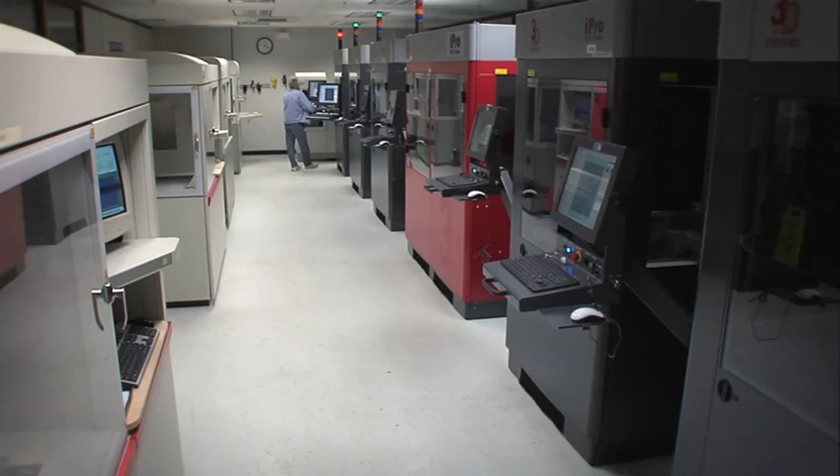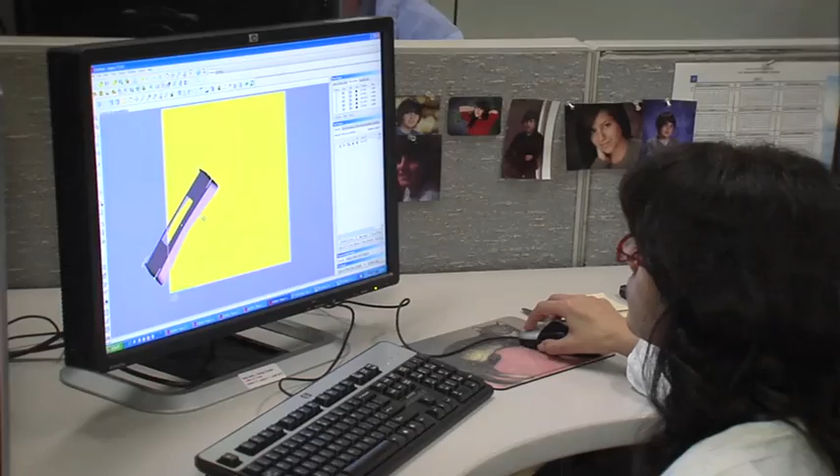This facility is operated by UAW 160 employees with some of the most competitive work rules in the corporation. These are very talented men and women, wood model makers, metal model makers, who basically operate these machines 24 hours a day, 7 days a week, 365 days a year.

These employees, these model makers, have taken their classic training and applied it to this new technology and come up with several innovations. In fact, some of the innovations that these men and women have created have become industry standards.

Our technicians work so closely with 3D manufacturing people that it has helped them to modify their equipment or actually bring enhancements into the trades and in the industry.

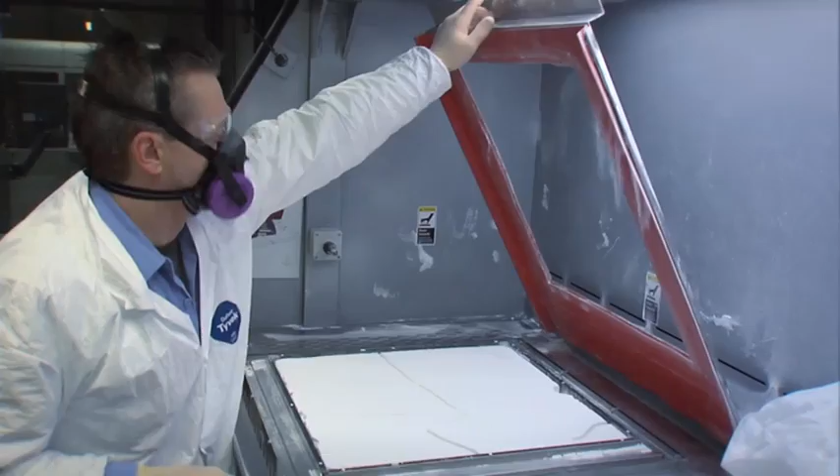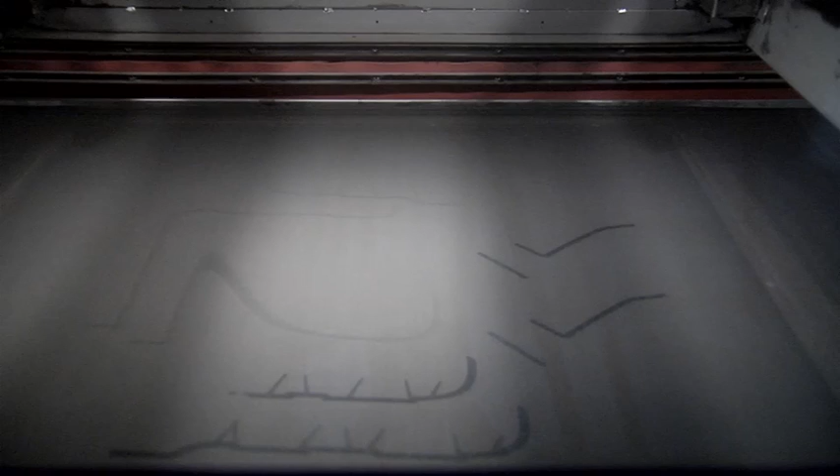Years ago, you would actually have to manually load those machines with this powder and mix those powders manually and then insert them. So they worked in conjunction with our folks to find automating ways of loading those machines. And through those ways of looking to automate them, we also found out, well, what about recycling some of this older material? Instead of just using virgin material, let's go ahead and mix a blend of reused material with new material. And they've actually developed a machine station that combines those in one.

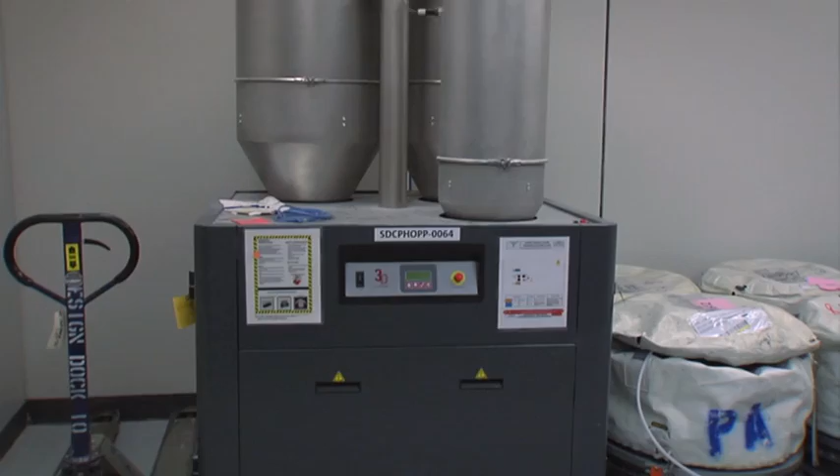To date, we calculate somewhere around 30% recycling benefit for us. And that again was with the collaboration of the Local 160 skilled trades folks down here in this very lab. They never stop amazing me on how they come up with better ways to do it.

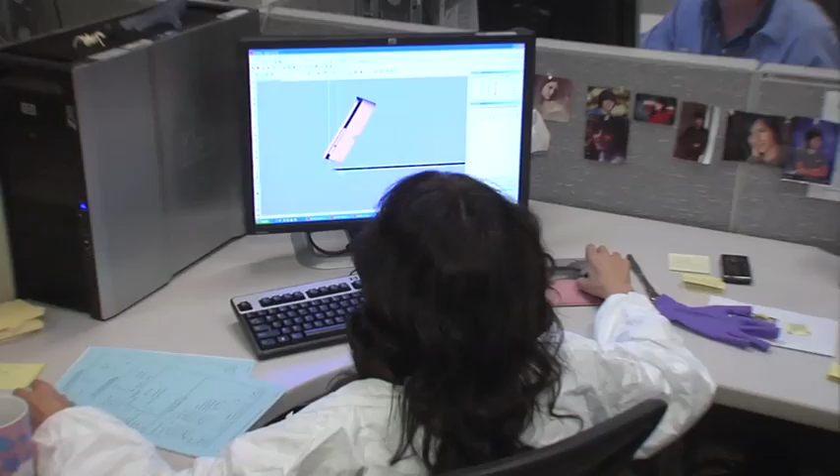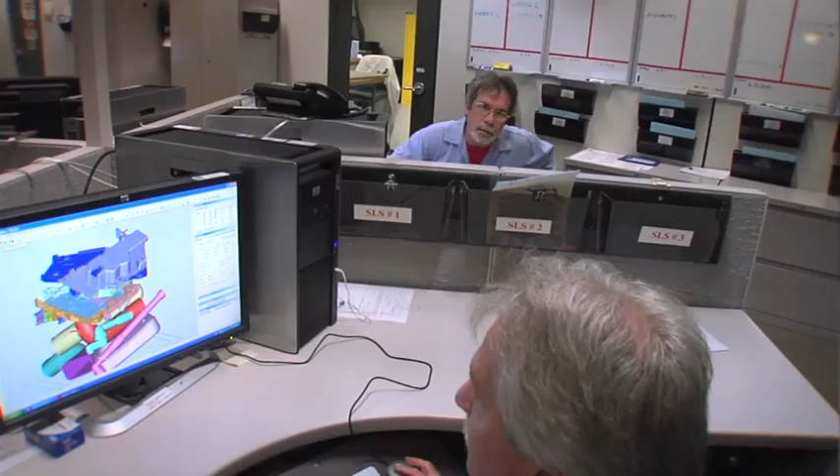I'm a wood model maker by trade. I've been in the RP lab for 15 years. The more I saw of it, I worked with it, and then I got into the department, and it just grew from there. It's unbelievable. And just seeing it advance, it's just great. I mean, things that we do now within a day or 2 days would take months to build by hand.

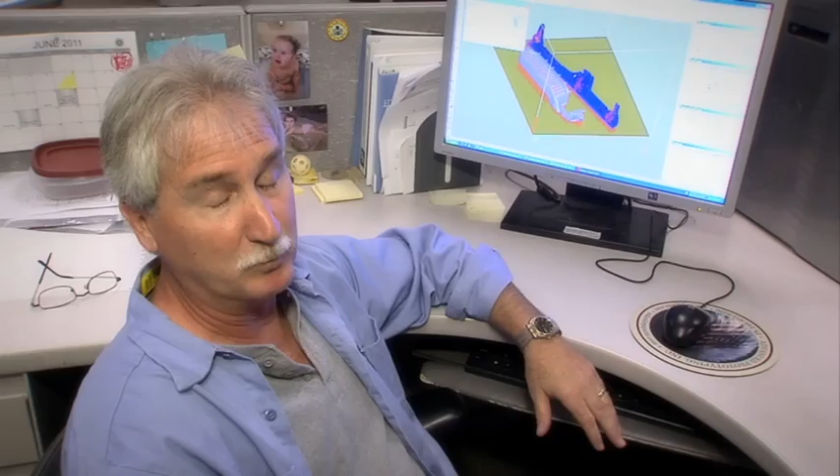We are really dedicated to what we're doing. That's the main thing. We all enjoy the work, and we want to see a good product come out, and that's our main goal. It's come a long ways from when we started.

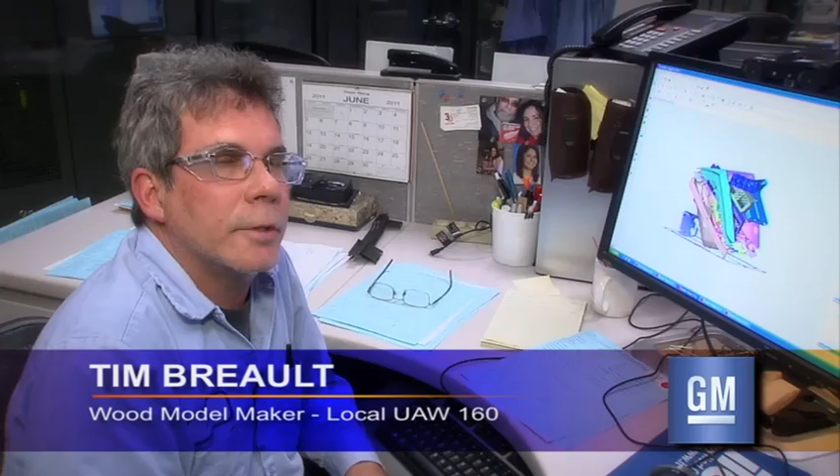I've worked for GM for 27 years. I'm a wood model maker by trade. And I've worked on the CNC machines prior to that, but it's just cutting up parts and manipulating parts, understanding how they work and function and whatnot.

As the hot jobs come down, like this one here, I was able to quick cut it. I was able to put them in the top of this shell here, I call it a shell. You can see these little windshield wipers, they needed right away. So I was able to place them on the top of a build and never miss a beat, and they just keep going. Been a pleasure working here.

We got a good group of people here. Enjoy it. So I got another 10 years or so.

I'm the newest person, one of the newest members here. I came in with 3 other people. Well, one of the appeals is because it was a small group. And also, I wanted to learn more about the computers and how to do these types of things. And I found it fascinating that you could take a laser and make a part out of it.

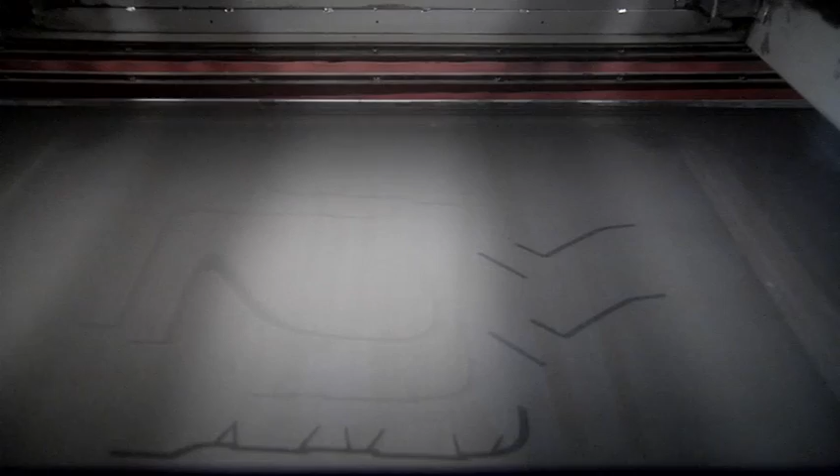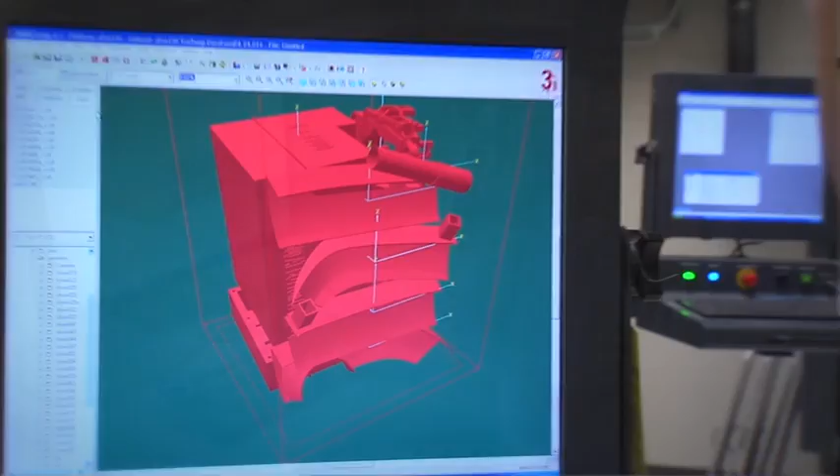There's several ways that we use our creativity, you might say. One of them is the setup of the jobs. We have to look at the part and see how it can fit on this platform in order for it to be made on the machinery. You have to look at it different ways, so you have to have good spatial relationship skills. Pieces that won't fit on these platforms, we have to make them in several pieces sometimes in order for it to fit on the platform.

I asked my daughter, but she's really not interested in this stuff. But my son, he would definitely be interested. So with the right training, maybe one day he'll be able to get a job here.

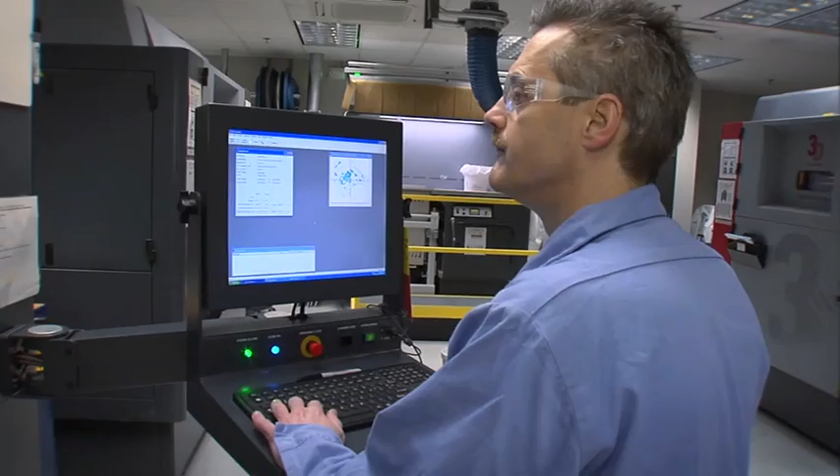We once upon a time used to be the plan B - oh, I forgot to get this part in a system, let's go to RP and get it made - to where now we're plan A. Hey, let's go there first, let's try to get it made there. Why spend the green dollars, why make the tooling changes and the tooling costs up front when we can actually utilize the rapid prototyping lab right now?

I don't see any end in sight for the use of this technology or General Motors' use of this technology. It is a way to reduce product development time, saves costs, gives designers more options. As such, we've been able to continue to grow, and I don't see that stopping anytime soon.